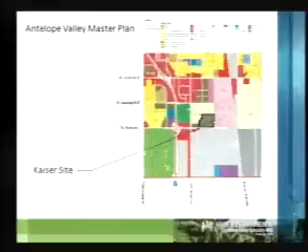Okay, very good. This evening, what we're presenting is an overview of our master plan process, culminating with the actual end product that we're going to show you in a moment. The project, as you stated, is located on L Avenue and the intersection of the future 5th and 7th Streets. It's approximately 44 acres, and it's part of the Amargosa Creek specific plan. As you can see in the PowerPoint, it's the lower right-hand corner of that particular site.

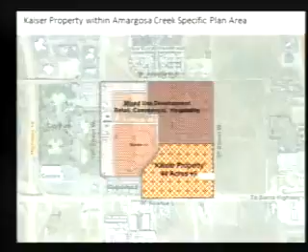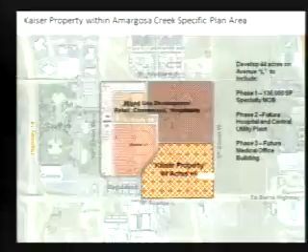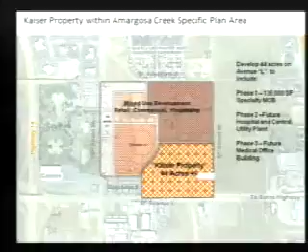Next. Basically, the full scope of what we'd like to do in the future is to construct, first of all, our Phase 1, 136,000 square foot specialty medical office building. And then in the future, at some point, a future hospital, central plant, and perhaps yet another medical office building, depending on how forecasts go.

Next, please. So we wanted to start off first just explaining clearly what Kaiser's goal is with this particular project. As you can see, it's to create built environments that support Kaiser Permanente's Thrive mission of healthier, happier places for our members, our staff, and the community. And we see the community not just as our members, as our campus, as the city of Lancaster, but all of the Antelope Valley, and quite frankly, the world.

Next. When we initially moved forward with the master plan study with the assistance of HGA out of Santa Monica, we looked at a lot of criteria, and we initially came up with this plan that you see up here that lays out the buildings around a central pedestrian promenade surrounded by some gardens and some parking.

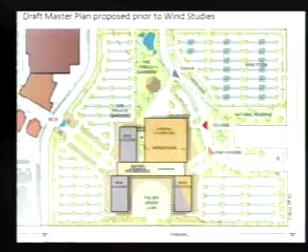Next. What we took into account is demonstrated by the photos you see. We looked at energy conservation, creating places for the community and our members to go outside and enjoy the outdoors. We included accessibility, local landmarks, history telling, and that basically supported the plan you see now, which is a pretty straightforward plan.

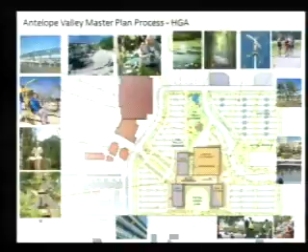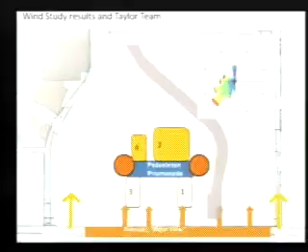Next. Then we had a little bit of time to take a pause and really investigate the wind concerns of the area. Our local Kaiser staff made a big point of asking us to delve into that, so we did several studies with the HGA team and also with our Phase 1 team, demonstrated by the wind rose you see in the upper right-hand corner.

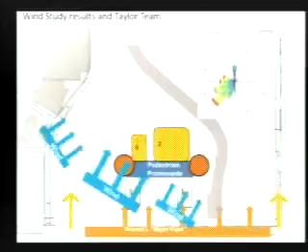But what happened is we realized we had to change our approach to master plan the site. Go ahead and click. We have quite a bit of wind coming in from the southwest corner, and we had to decide whether to fight the wind or work with it and minimize that wind.

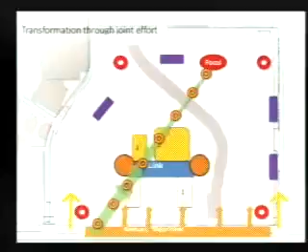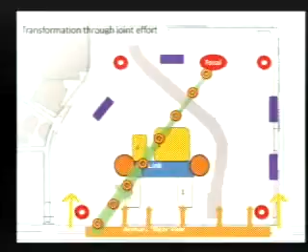Next. We also took a step back and brought on some professionals to look at branding the site, because what we wanted to do at Lancaster that was unique is reflect the Lancaster and Antelope Valley character, rather than just stamping a typical Kaiser campus where you know it's Kaiser but have nothing identifying the campus and linking it to the specific community it's in.

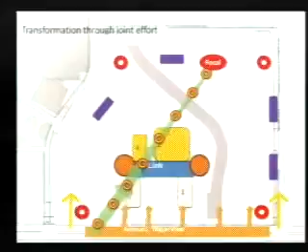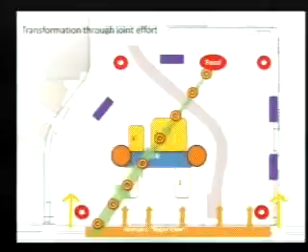So we started to identify some viewpoints and focuses as you approach the site from the freeway that we really wanted to emphasize, and you'll see that later on in the development - the ideas of actually marking that as a specific campus in Lancaster.

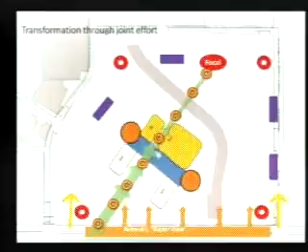And what you're seeing here in the PowerPoint is that we actually rotated the whole campus plan 45 degrees to allow the wind to move through the campus. Later on you'll see how we used landscaping and berms to slow that wind down so you could actually read a newspaper in the Central Plaza.

Next. And that basically is that pedestrian promenade, something we'll touch on with the first phase, but we'll fully implement it with the development of the future buildings. Next.

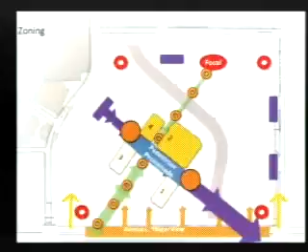This also is showing how we zoned the campus. It's very important to keep different types of circulation separate. For example, you don't want to have your most used driveway to get to the first medical office building shared with ambulances, etc. So that's just one of the studies, and we've just truncated a demonstration of it.

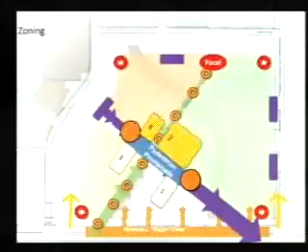But basically the zoning of the site, as you can see, our major entrance is in the lower right-hand corner to get to the specialty MOB where we expect to have the highest volume. This is conceptual, so it's not literally right there - you'll see that later on. But by turning it 45 degrees, we also found it allowed us to give the future buildings more space and more flexibility, so we were very happy with that outcome.

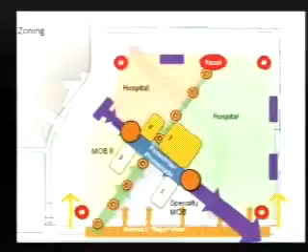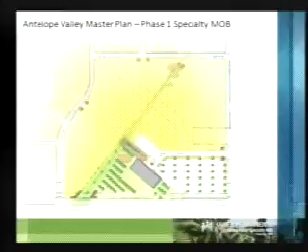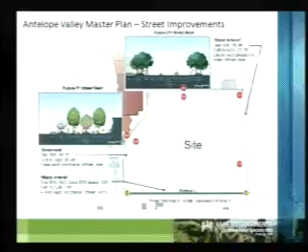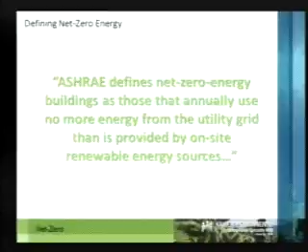What we're talking about is Kaiser's got a new drive to go after net zero. Net zero basically means that on an annual basis, you will produce as much energy as you consume.

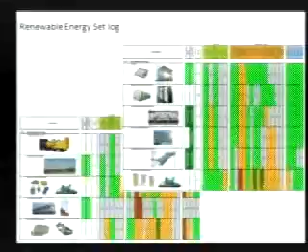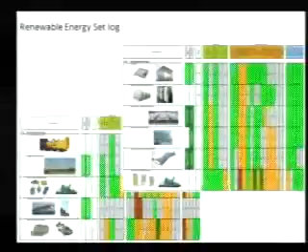One of the things we did as part of the master plan with HCA is we came up with a whole list of possible sustainable energy systems. But before that, we reduced the building's energy load with a highly improved insulated envelope, meaning the roof, exterior walls, and slabs. We implemented LED lighting throughout, which reduces the cooling load, and we're taking advantage of daylighting to reduce the power required to run the LED lights. We're also using recycled water, extending the recycled water system already here in the city of Lancaster, and looking at some other systems.

Initially, this is the picture our consultants brought to us, all the possibilities including geothermal, biogas, etcetera. We looked at how that works with our goal for the site and everything we're trying to do, like creating a friendly healing environment for staff and members, encouraging them to walk and go outdoors, and feeling like the campus is a friendly, comfortable place to be.

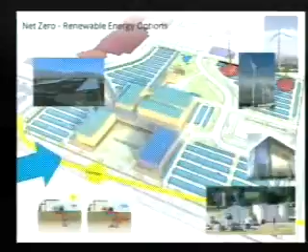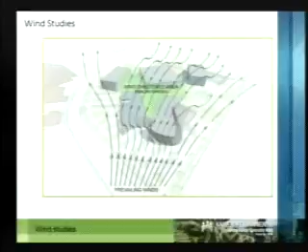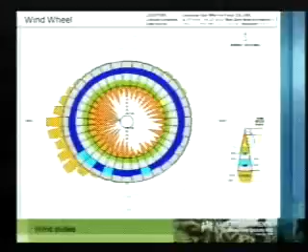We went back again to the wind studies, looking at what the climate of Lancaster has to offer that could be a solution for our energy needs. We looked at the wind, and we also looked at solar, of course. We all know Lancaster is the solar panel capital of the world.

So we have this list, and what we found through doing specific targeted studies, and even bringing on turnkey vendors that deal with these systems, is we've narrowed it down to 3 possibilities for where we're going to get our sustainable energy: photovoltaic, wind, and solar thermal.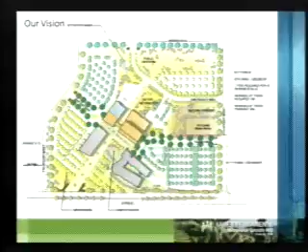Again, we went back to our mission statement and asked how that works with it. This slide demonstrates the kind of place we're trying to create, not an ocean of parking lot, but bringing in trees and plants and everything to really make it a nice space to be. We compared that with our options.

This is just showing that we're using the city's list of trees, but we're also trying to approach net zero with the plantings too, so we're taking the most drought-resistant samples from the city's list.

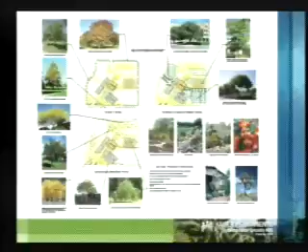So basically, the big picture is that in order to provide net zero for our buildings, we found we had to do a combination of things. What that showed us is that to actually hit net zero with this campus, we think we need to use wind turbines in combination with solar and thermal panels.

This is demonstrating that the prime location for those turbines would be in the far northeastern corner of the site, which happens to be in the path of the strongest winds. It's also far enough away from our future 5-story hospital and from any residential areas, and you can see how we have the mixed-use development basically surrounding the site.

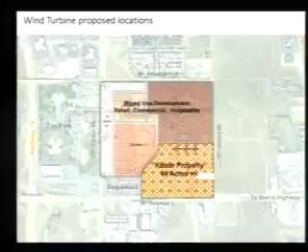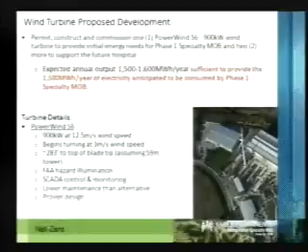So we went into detail really finding out, will this work? Basically what we found is that with a single wind turbine, we could provide all the power we need on an annual basis for our first building.

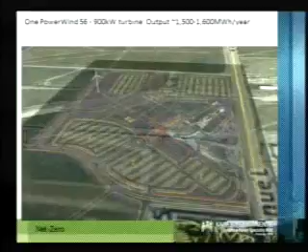This demonstrates where that would be located. The street you see going from top to bottom on the right is L Avenue. This is an actual aerial photo, and you can see how right now the land around there is undeveloped. It's zoned commercial industrial, I believe.

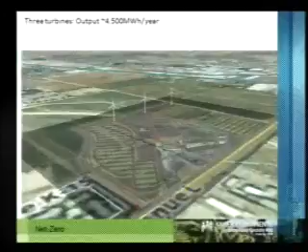In the future, what we'd want to do is add 2 more turbines to support the hospital, and that would carry the bulk of the load. What that allows us to do is have trees, plants, and Thrive Walks throughout the campus so people can enjoy the outdoors.

And again, this is going to be open to the community. We even have an outdoor amphitheater. It's small, but it works in conjunction with our conferencing center that the community would be able to enjoy, because we want to bring people in and really come to the site, not just when they're sick, but also when they're healthy, so it becomes part of the community.

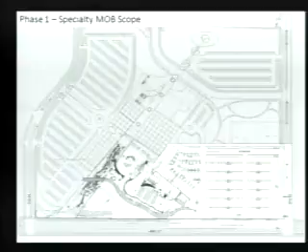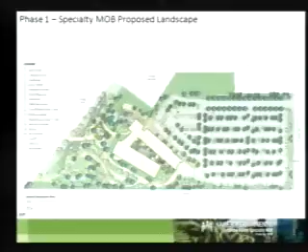This slide basically just shows the boundaries of the Phase 1 development, and included in those boundaries is quite an extensive landscaping effort. That wedge of land you see there is what you'll first see when you're driving down L Avenue, leaving the freeway. You'll see that whole vista of what we call the meadow, but it's actually quite a few articulated, programmable outdoor spaces. You'll see that open up, and then setting in it will be our building. This is an aerial of the southeast, so if you're coming from Sierra Highway down L Avenue, this would be what you'd see.

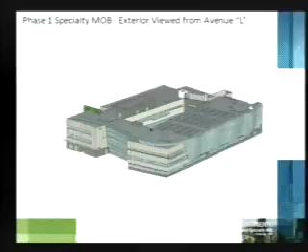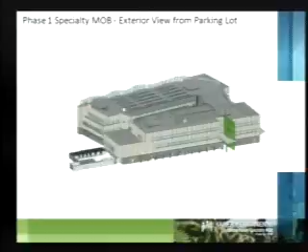So again, we just want to reiterate how critical it is to our mission, and we think to everyone, the idea of promoting a healthy community, supporting a healthy environment, ensuring good health extends beyond our doors, and we have a commitment to doing whatever we can on our sites to make that happen.

I think that's it. Are there any questions? There probably will be some. And thank you for the presentation. Okay, thank you. Seeing it the second time is even more informative, I think, than the first. Yeah, I tweaked it a little bit.

I believe you shared with us the clientele you serve in the Antelope Valley, approximately 100 and how many thousand? I thought it was 165,000. Kelly, I don't know if you can correct me. 104? Maybe that's our projected target. We have a target that we use, that we build to, that's 5 years beyond the date the building is done. And I believe that targeted population is 165. Right, where I got mixed up. Impressive numbers, that's for sure.

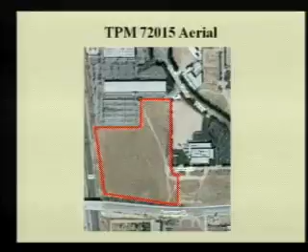So that wraps up the summary of the last couple of meetings that we have. Of course, the residential zones include regulations on all sorts of matters that we are open to talk about, so that's at your discretion where you want to go and what you would like to discuss. Staff is available for any questions.

All right, thank you. Do we have any speaker cards on this matter, on this public hearing? We do not, I don't see any. All right, thank you. You might want to poll the audience. Ms. Brown? No. All right, thank you.

Thank you for the update. We've had extensive discussion to this point in the review. I think at the last meeting we stopped at the suggestion that photovoltaic systems be a standard, minimum standard of development in future residential projects. That's pretty much where we ended our discussion and suggested a field trip, so thank you for doing that. Not that I want to limit discussion, but we can either pick it up there or go wherever you folks want to go with this.